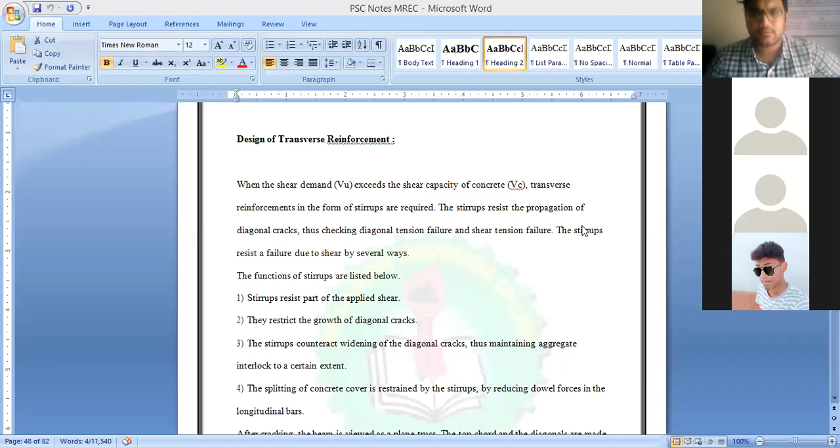So I think in the previous class we have done with the quiz. So few attempted very well, and the rest have to practice. Okay, so I request, I already forwarded you the notes, right? So please guys go through the notes and be up to date with the prestressed structures. So whenever college starts, we'll definitely start with a good industrial visit where I will try to show you

how the pre-tensioning and post-tensioning of structural elements like sleepers, precasting elements, girders, all these we can see in Hyderabad itself because there is a lot of construction going on. Even post-tensioning slabs are also going on. Okay, so they are very nearby, so we can go and visit them, right? So then you will have a clear idea on it.

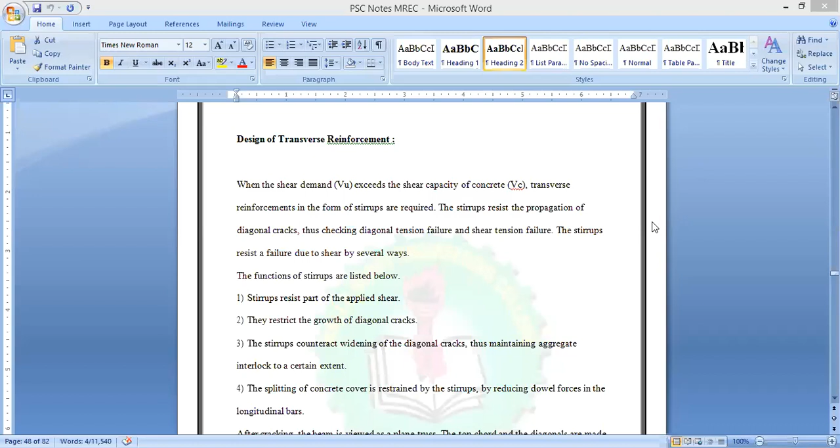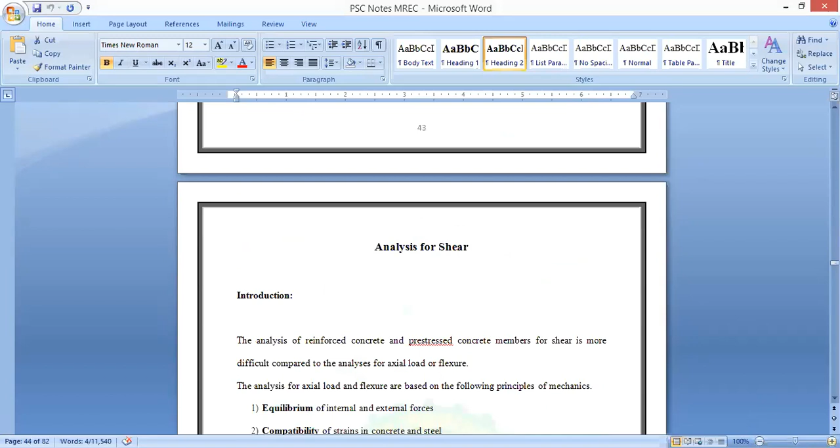Okay, so I think in the previous class we discussed about analysis of prestressed concrete structures towards shear, right? So let me just revise the content. So this is the analysis of shear. So here shear analysis is taking place with three different mechanisms. One is equilibrium, the other one is compatibility, and the third one is constitutive relationships of different materials.

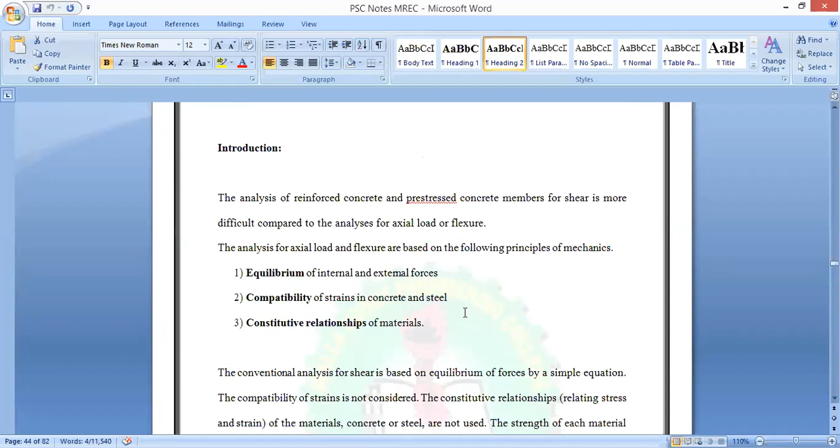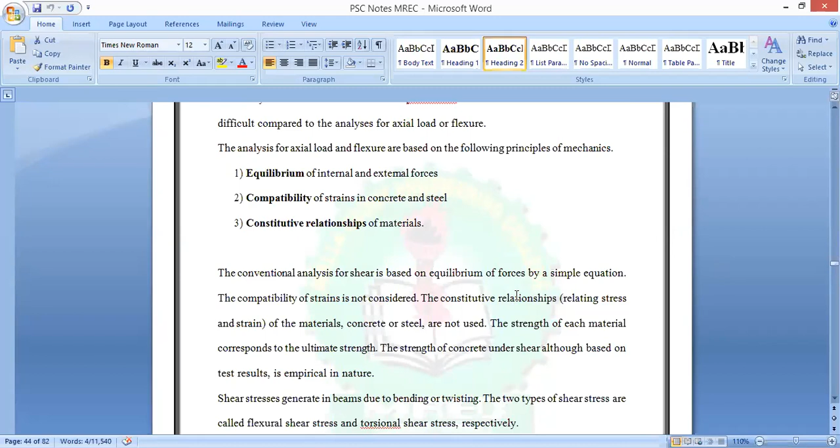Okay, out of which I think conventional analysis for shear is only based on the equilibrium of forces, with simple equilibrium conditions. Based on that only the prestressed concrete element will be analyzed in terms of shear. Okay, so here whatever shear stresses are going to be generated in beams due to bending or twisting.

Because I think you all have done a lot of experiments in strength of materials on it. When the member is subjected to torsion, you are going to calculate the shear modulus or modulus of rigidity, which is talking about the shear happening in the member. So the two types of shear stresses are called flexural shear stress and torsional shear stress. So this is what we are going to calculate.

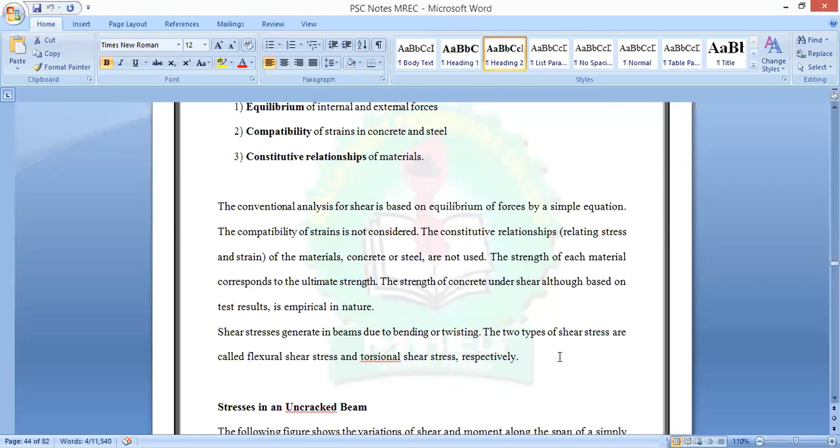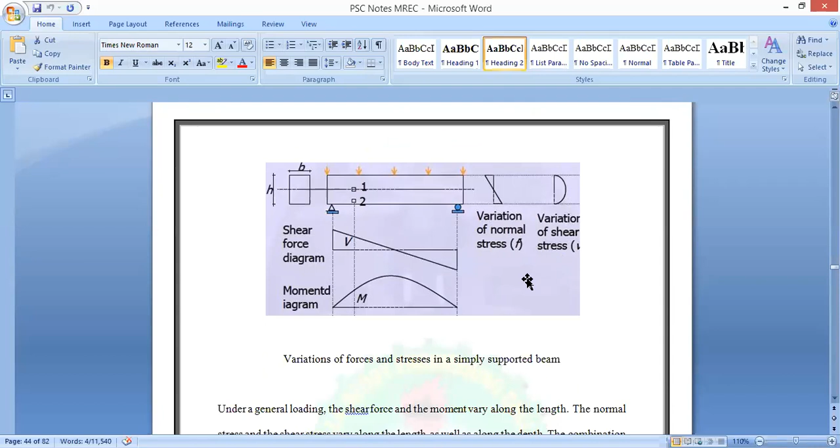In analyzing the member towards shear, right? So the stresses in uncracked beam, we already seen that. So here when a beam is subjected to uniformly distributed load, you can find the shear force diagram and bending moment diagram where the variation of stresses will be the normal variation like this, and the shear stress variation will be like this. This is the variation of forces and stresses in a simply supported beam, right?

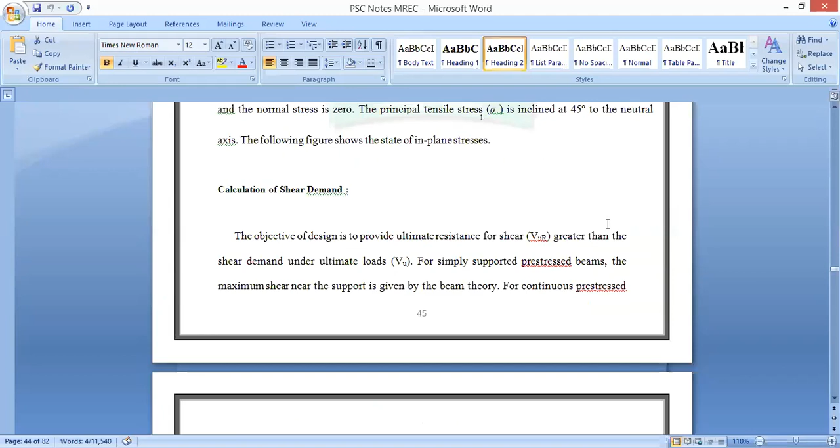And the next one is calculation of shear demand. So where exactly the shear demand takes place - it takes place at the circumference of the section, right? If you take a rectangular beam, you are supposed to provide the shear reinforcement only on its circumference. So the main objective is to provide the ultimate resistance for shear, which should be greater than the shear demand under ultimate loads. So obviously your design shear should always be greater than the applied shear force, right? That is how the calculation of shear demand takes place.

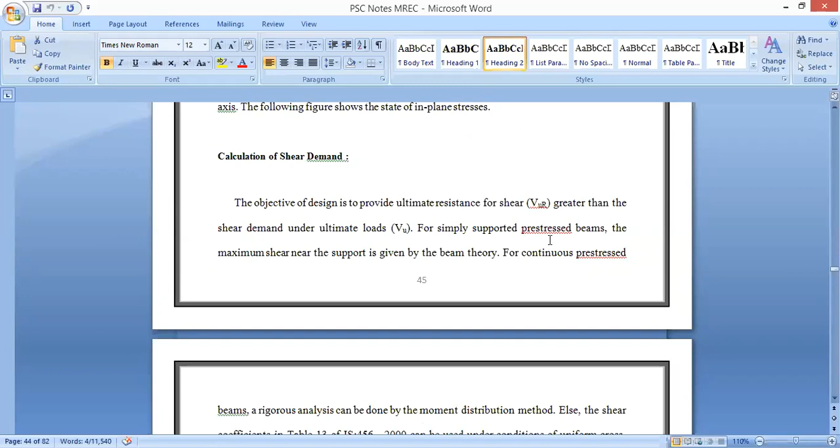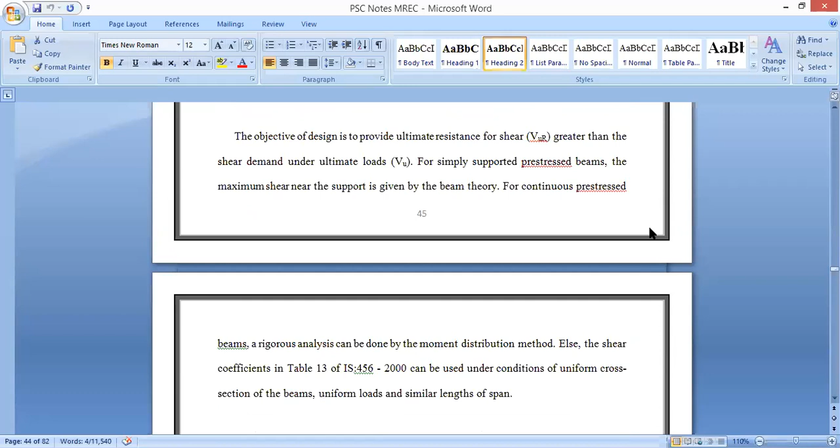So let us take continuous prestressed beams - there will be a rigorous analysis done based on the moment distribution method. Okay, else the shear coefficient given in IS 456-2000 in table number 13, which is based on different conditions of uniform cross section of the beams and uniform loads, and even based on its length - length nothing but length of the spans. Okay, so this is talking about the shear demand.

And the next one is design of stirrups. This also we've gone through - where exactly you will provide stirrups in a beam. At the mid span of the beam, the spacing of the stirrups will be more. Why? Because the shear stresses or shear force will be less. Shear force will be maximum towards the support. By that, more number of stirrups will be provided with less spacing towards the support.

Support in the sense, one fourth of the distance at supports will be having more stirrups, which takes care of the shear forces. At center there will be maximum bending moment, and shear stresses will be very less, almost zero at center for a simply supported beam.

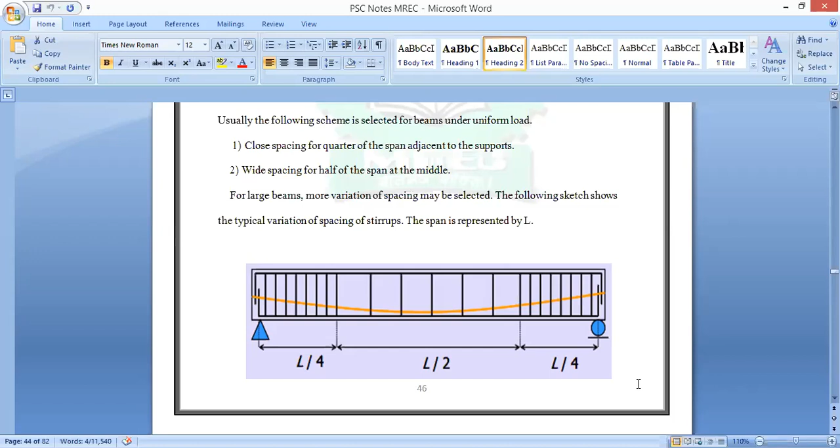If you take a cantilever beam, the bending moment and shear force will be more at the support. So the spacing of the stirrups will be very less towards the support, and towards the free end, the spacing of the stirrups can be more.

So in that way the stirrups are designed. For designing the stirrups, as per IS 456-2000, we will go through the design concepts. So the next one is the design of transverse reinforcement.

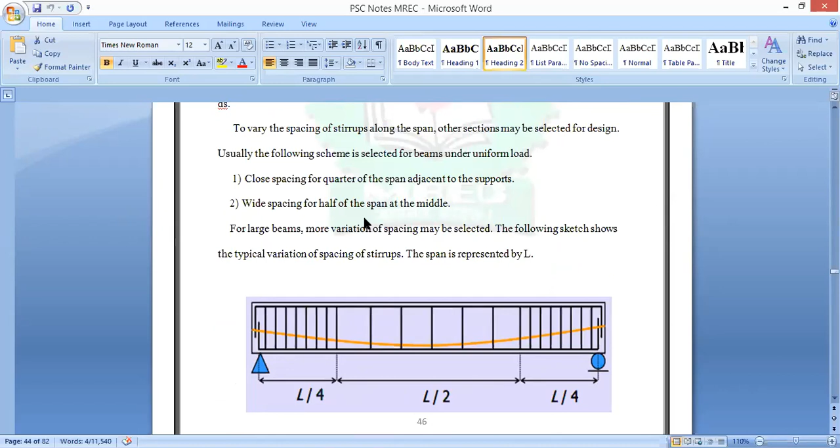What is the difference between stirrups and transverse reinforcement? Transverse reinforcements are nothing but a reinforcement which is provided to take care of the shear force. That is the meaning of transverse reinforcement.

What are the two reinforcements in a beam? There will be a longitudinal reinforcement, which runs within its length. And the next one is lateral reinforcement, also called transverse reinforcement, which is provided along its circumference.

So when the shear demand exceeds the shear capacity of concrete, the transverse reinforcement will be in the form of a stirrup. Whenever it exceeds, we are supposed to provide stirrups along its circumference.

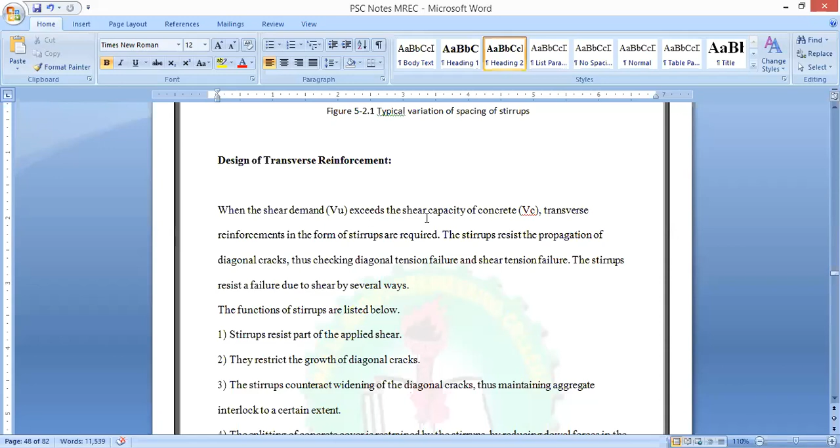So the stirrups resist the diagonal cracks exactly, and check diagonal tension failure and shear tension failure also. In that way, the stirrups resist failure due to shear by several ways.

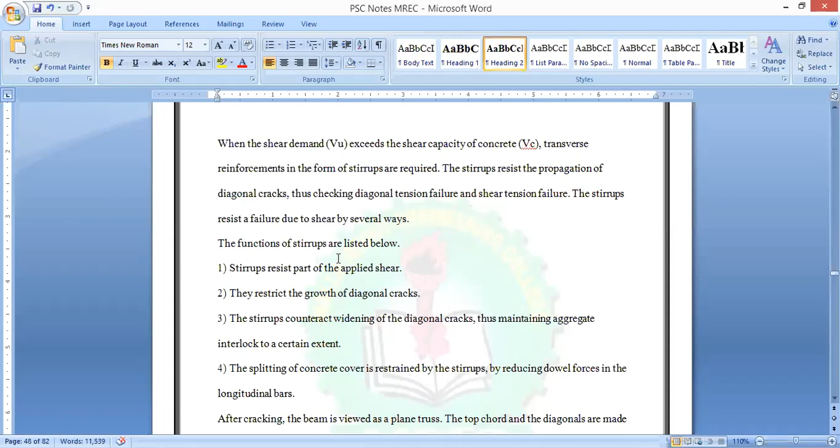How better the transverse reinforcement takes care of different types of failures - let us go through the different functions. The functions of stirrups are going to be listed.

The first one: stirrups resist a part of the applied shear. The stirrup reinforcement is only to take care of the shear forces. So that is the one reason why you provide transverse reinforcement.

Second one, it will resist the growth of diagonal cracks. In RCC, the shear cracks will be at an angle of 45 degrees at the ends, because there will be maximum shear force towards the support. So by that, it will resist the diagonal cracks.

So stirrups are provided to resist applied shear, and the next one is to resist growth of diagonal cracks. Third one, stirrups counteract widening of diagonal cracks - not only controlling the cracks, even if the crack exists, it will counteract and control the widening of the diagonal cracks.

This maintains aggregate interlock to a certain extent. So providing stirrups in a beam leads to counteracting or controlling the widening of diagonal cracks, which maintains aggregate interlock to a certain extent.

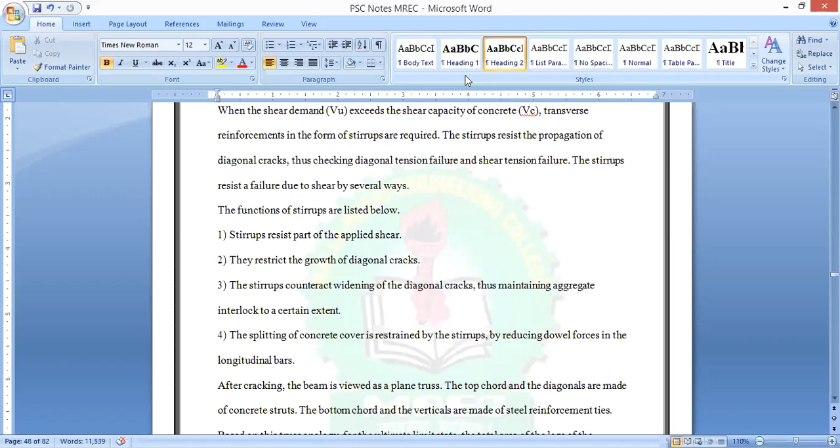In that way, shear reinforcement is going to be useful in any kind of longitudinal member. These are the functions, and these functions are very, very important. Please try to go through all this.

Very important. After cracking, what happens? The beam is viewed as a plane truss. The top chord and the diagonals are made of concrete struts, and the bottom chord. So if you view the beam as a plane truss, the top chord and the diagonals are made of concrete struts, and the bottom chord and the verticals are made up of steel reinforcement.

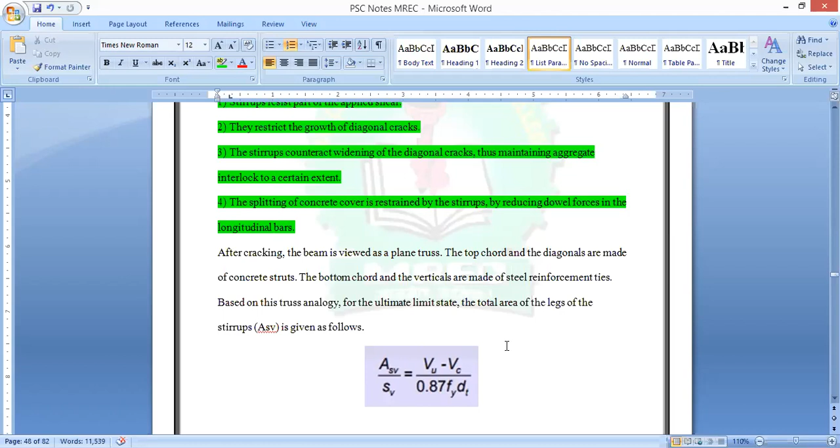So based on this truss analogy, what happens? The ultimate limit state and the total area of the legs of the stirrups is given by a formula. I think you all know this formula, which is also there in IS 456 2000: area of shear reinforcement by spacing is equal to.

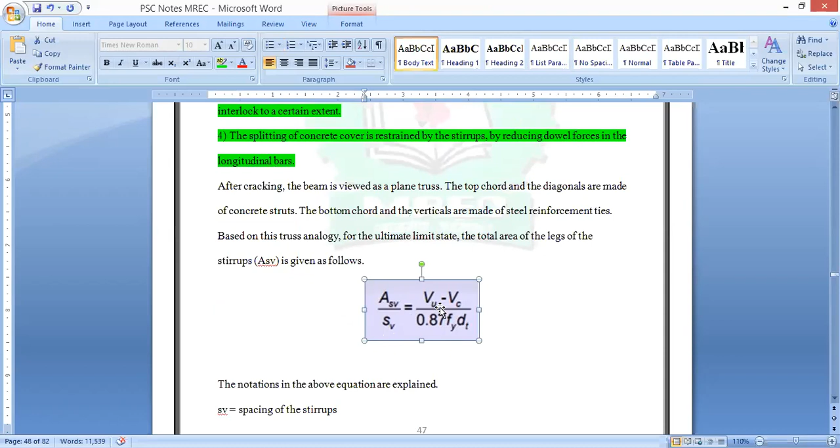Here you can see the notations. SV is nothing but spacing of the stirrups. DT is nothing but the greater of DP or DS.

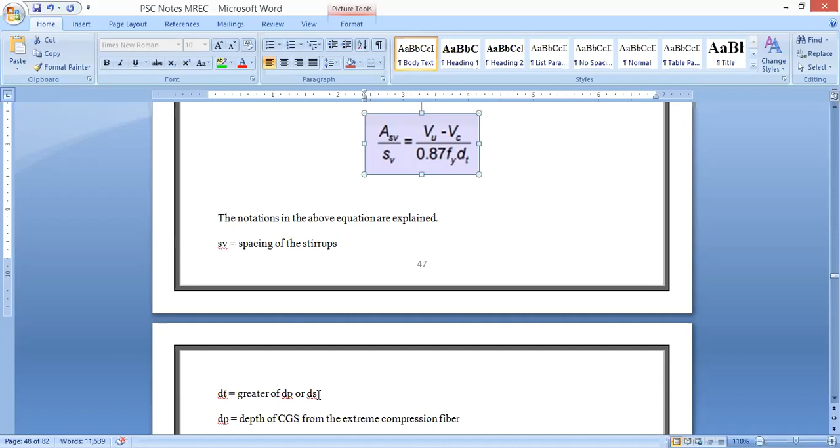DP is the depth of center of gravity of steel from the extreme compression fiber. DS is the depth of center of the non-prestressed steel. What do you mean non-prestressed steel? Whatever reinforcement we provide in a prestressed concrete beam to have skin reinforcement, to bring it into an I shape or rectangular shape, that reinforcement is the non-prestressed steel element.

Why don't we stress that steel? That steel is only to take care of the shear and to make that into an I shape. We call that skin reinforcement.

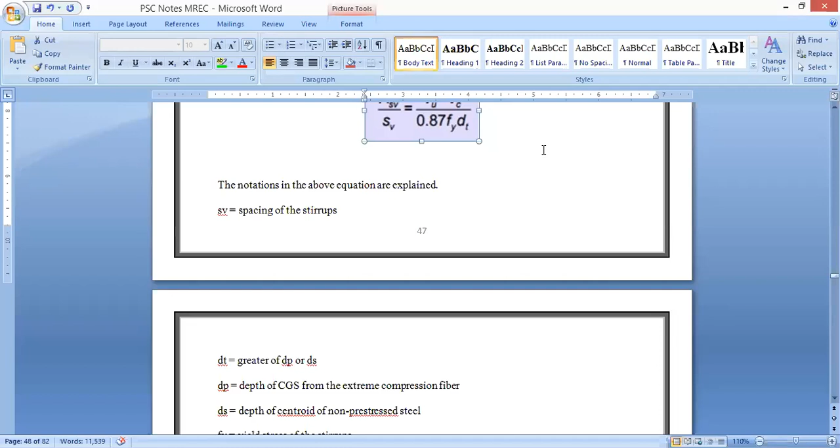Let us see the notations, then we can discuss the formula. SV is spacing of the stirrups. dt is the greater of dp or ds, the dt value you are going to consider, the maximum of these two: depth of center of gravity of steel from the extreme compression fiber, and depth of centroid of non-prestressed steel. We take the greater value of these two as dt.

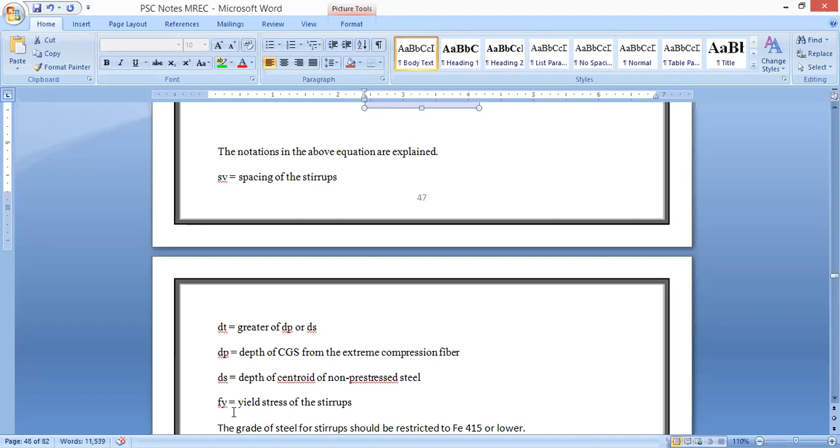The next one is Fy, which we all know is the yield strength of the stirrups. The grade of steel for stirrups should be restricted to Fe 415 or lower. You should not go more than Fe 415, because there is Fe 550 steel available, but you should not go for a higher grade steel for stirrups. Why? Because there's no need of that. You can go with even Fe 250 for making stirrups.

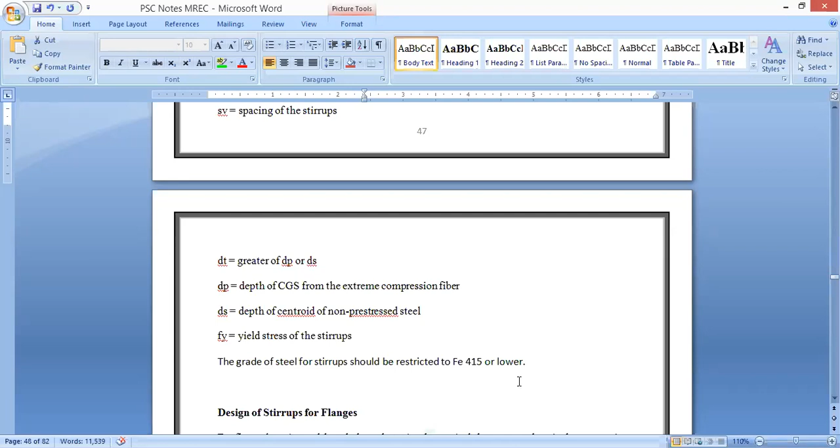And the diameter of the stirrups also won't go beyond 16 mm. It will be like 8 mm, 10 mm, 12 mm or 16 mm. They won't go beyond 16 mm even to make a stirrup reinforcement. So this formula shows you how to calculate the total area of the legs of the stirrups with the present formula.

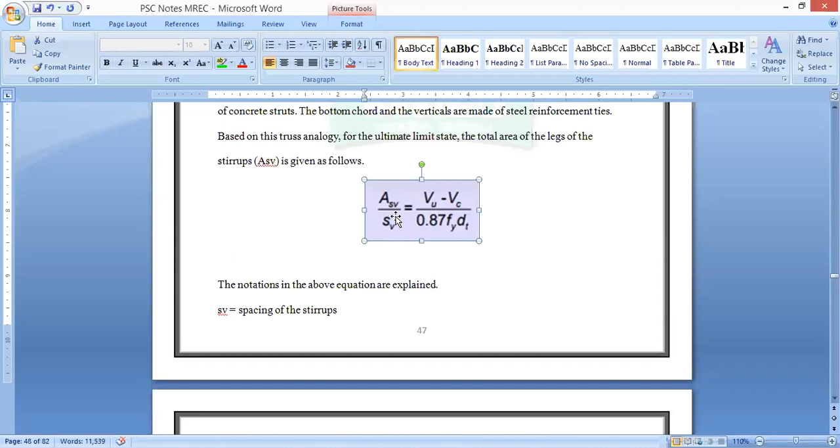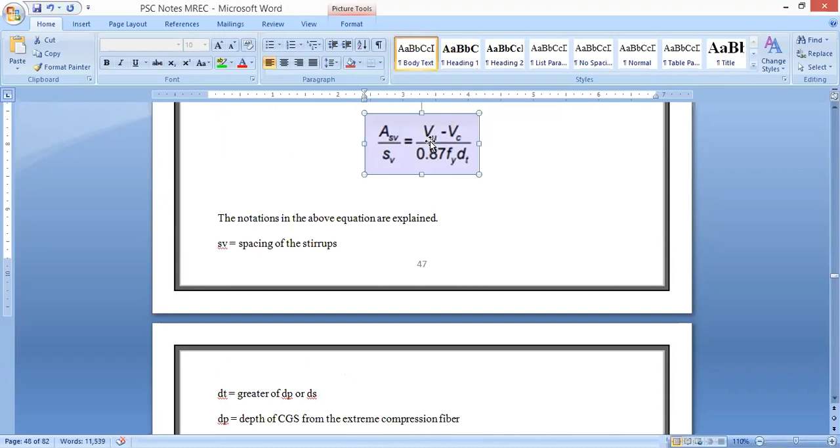VC is nothing but shear force in concrete, and this is nothing but ultimate shear force. The next one is design of stirrups for flanges.

How are you going to design stirrups for flanges? In your bridges, particularly prestressed beams will be in the form of an I shape or T shape, so there will be flanges. How are you going to provide stirrups for flanges? If it is a beam, there will be top reinforcement, bottom reinforcement, and stirrup. But coming to an I beam, there will be two flanges, top and bottom, and a web.

How are you going to provide stirrups for flanges? For flange sections, although the web carries the vertical shear stress - I think we all know, even in steel structures, if you take an I section, the top flange takes care of compression forces, the bottom flange takes care of tensile forces, and the web takes care of shear. In the same way, for flanged sections, particularly I section, T section, angular section, C section, the web carries the vertical shear, no doubt at all.

But there is a shear stress in the flanges due to the effect of shear lag. That is very, very, very important. Please highlight this.

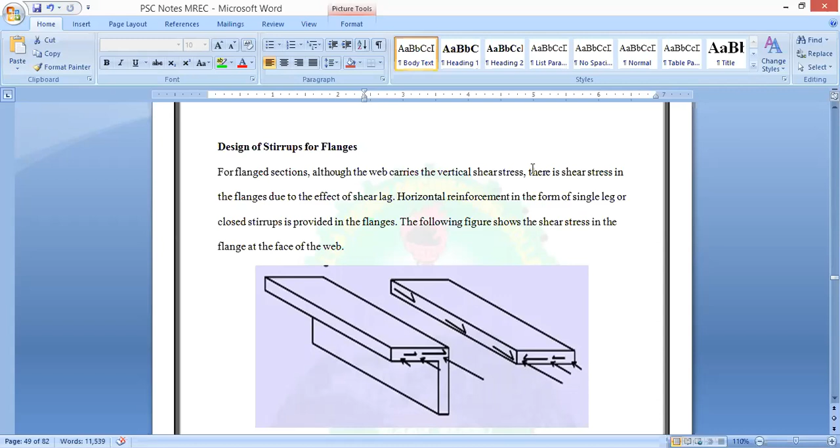Okay, because we all know web carries the shear stress. Web carries the shear forces, and by that we have to design web to have a maximum shear stress. But why do we have to design flanges also for shear? Because there is a possibility of shear lag.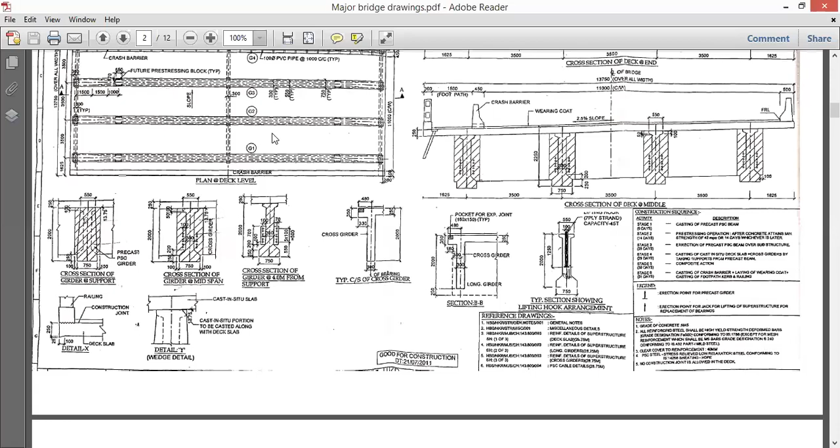So by that you can easily identify and recognize the reinforcement.

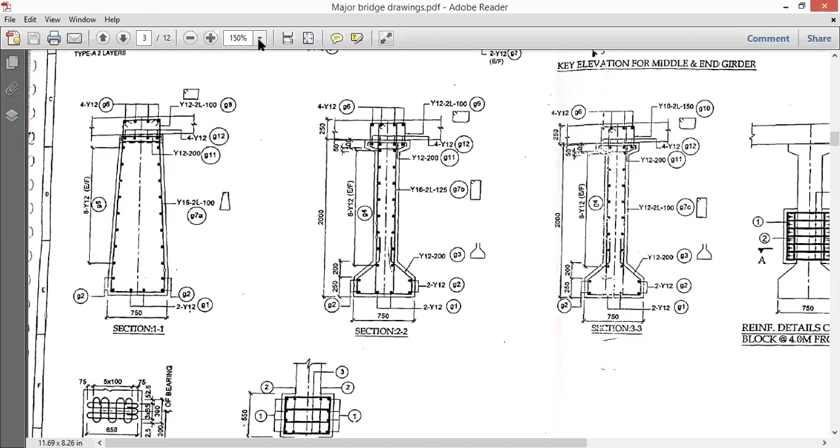Now for this I section, what are the flanges? The top is an I shape, the bottom is also an I shape. I mean flange — top flange, bottom flange, and web.

So if you take this as an example, let's show what is the main reinforcement and the stirrup, the shear reinforcement.

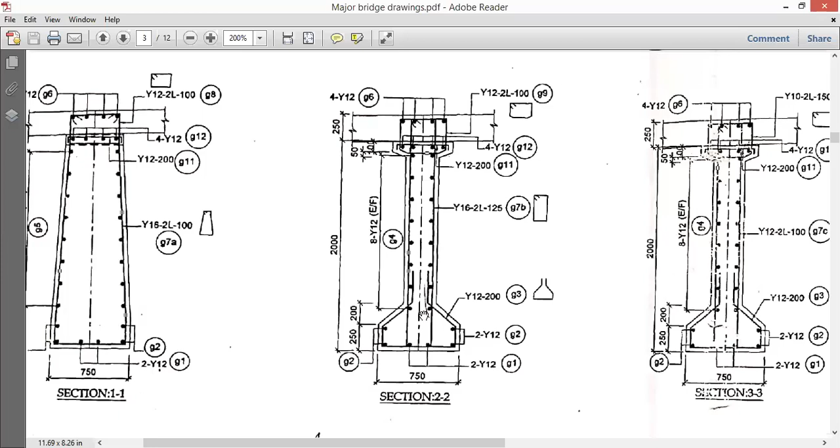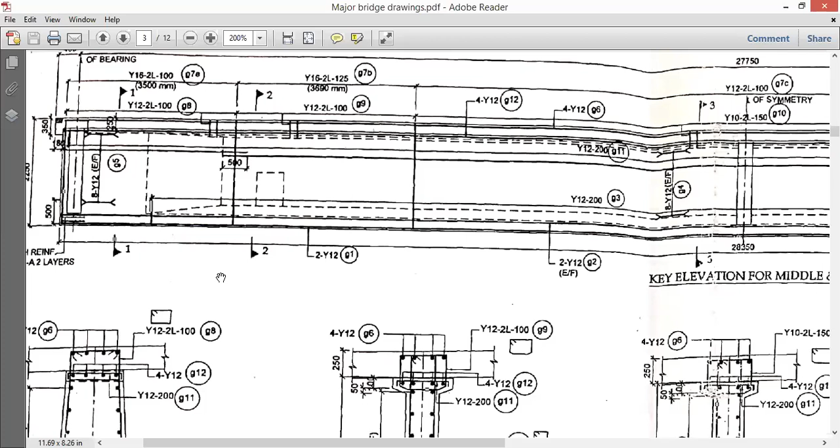If you see the girder from the end, it will be in the form of a trapezoidal shape. If you see the girder at section 1-1 - the longitudinal girder has a length of around 27.750 meters. At this section it will be trapezoidal shape, and if you see the same longitudinal girder at another section, it will be an I shape.

At center it is section 3-3, and at center it will look like this shape. So a section of the longitudinal girder will have a different dimensional pattern. When you see it practically, you will understand.

So, what are we discussing? We are discussing about the transverse reinforcement, nothing but stirrups or shear reinforcement for the flanges.

Why? Because there will be a shear lag effect in the flanges. That is the reason why horizontal reinforcement will be in the form of a shear single leg or closed stirrups provided in the flanges.

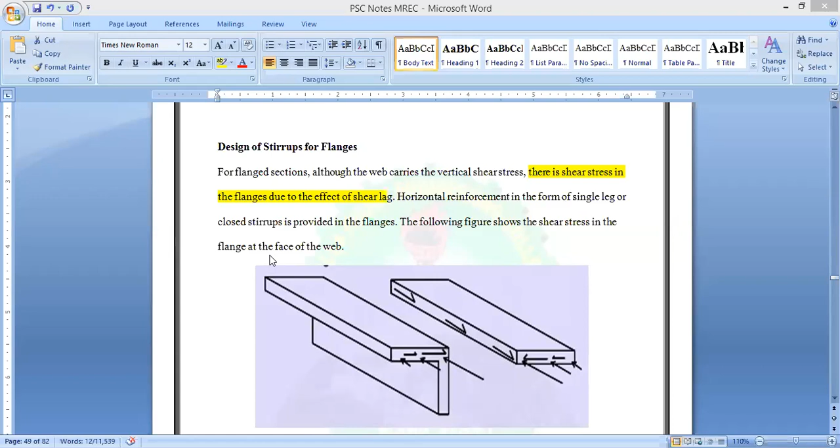The following figure shows the shear stress in the flange at the face of the web. Near the web's face you can clearly identify how the shear lag effect takes place on the surface of the flange. Because of this effect, you have to provide shear reinforcement to take care of the shear lag effect and resist the shear stress in the flanges also.

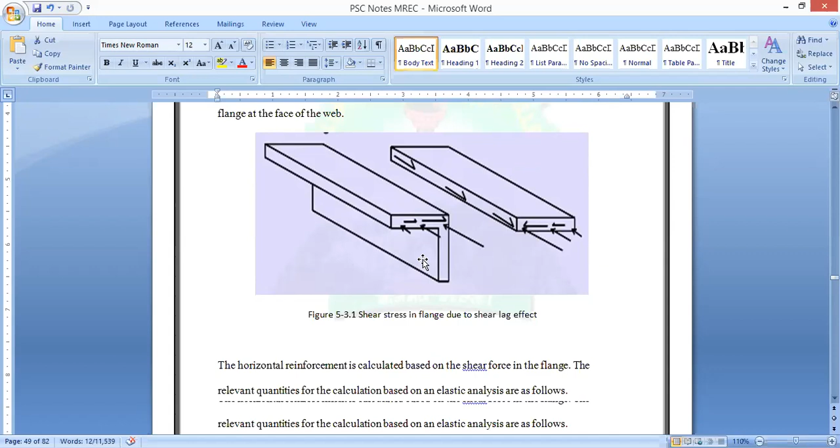So the horizontal reinforcement is calculated based on shear force in the flange. The relevant quantities for the calculation, based on elastic analysis, are as follows. First one, shear flow.

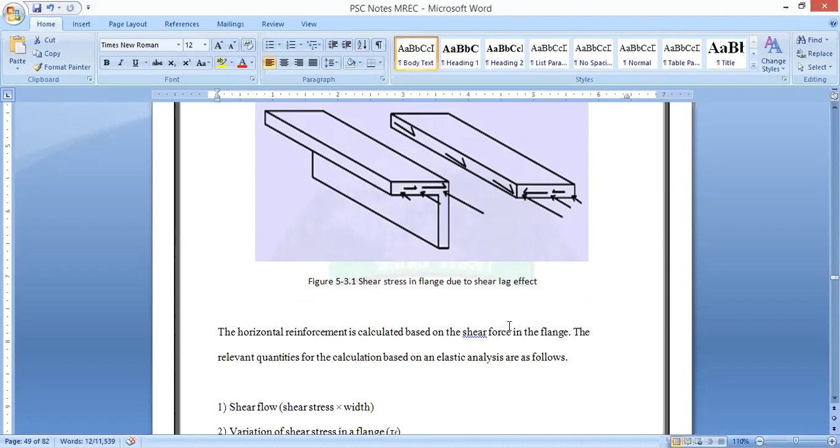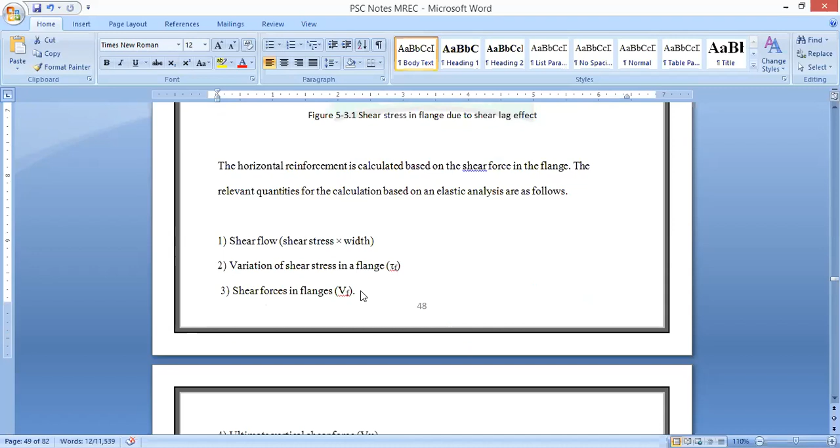What do you mean by shear flow? Shear stress into width. Next one, variation of shear stress in the flange, denoted tau F. Next, shear force in flanges, indicated with the symbol VF. Ultimate vertical shear force, VU.

These are the same formulas we saw earlier. VU is nothing but ultimate vertical shear force. VF is nothing but shear force in the flanges. Variation of shear stress in the flange is indicated with the symbol tau. Tau always indicates stress, V always indicates shear force.

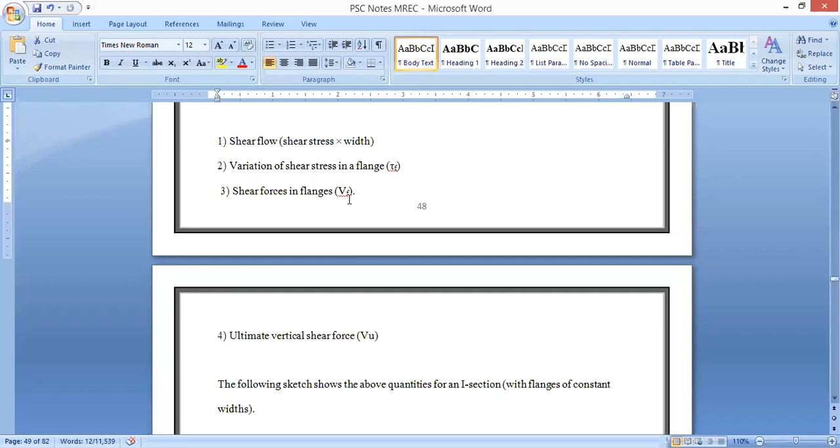Okay, now let's see how the shear effect will be on flanges - how it behaves in an I section. The following figure shows the shear flow and the shear forces in an I section, particularly in the flanges.

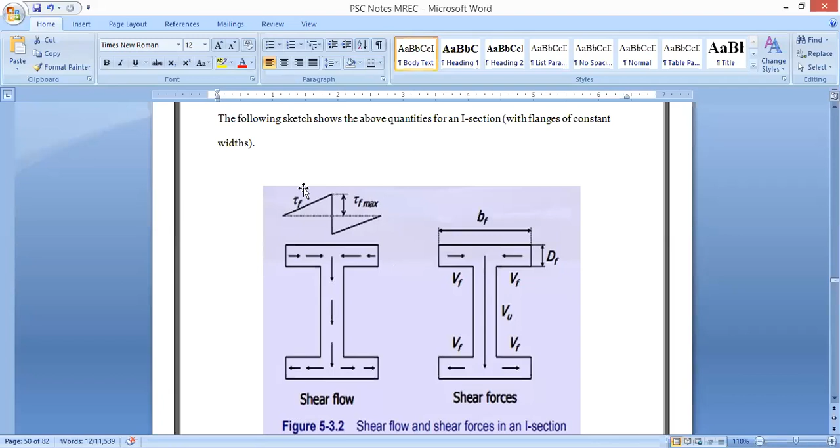With constant flanges, here I took a uniform section, which is a symmetrical section. This I section is symmetrical about both axes, X and Y.

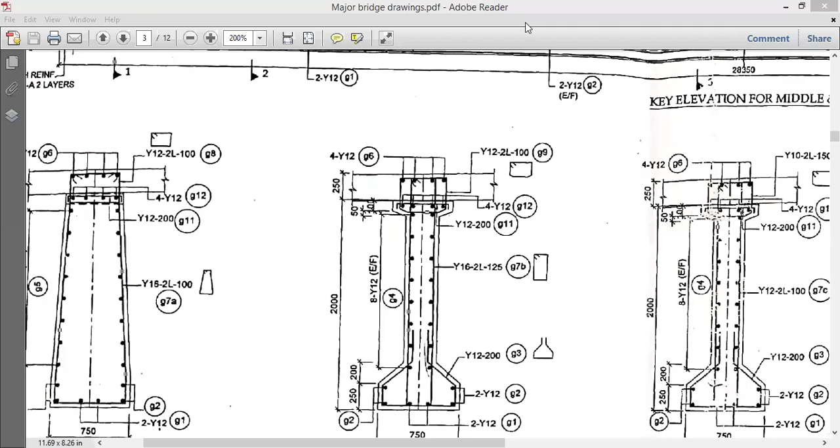What you saw earlier in the diagram - is this I section symmetrical? This one is symmetrical about the Y axis, but not symmetrical about the X axis, isn't it? So all our I sections need not be symmetrical - sometimes you may find I sections which are unsymmetrical about both axes too. So here we are talking about a section which is symmetrical about both axes.

So this is a section - here you can see how the shear flow takes place in the flanges and the web. See how the shear flows in the web and flanges. So this is the shear force, this is the shear flow - shear flow and shear forces in an I section.

So if you draw the shear flow diagram - I think you all know how to draw the shear stress diagram. How does the shear stress diagram for an I section look? Can anyone say how the diagram will be? The diagram will be something like this.

One second, let me show it on the board. So let me take an I section. In this I section, how does the shear stress flow take place along it - so this is the neutral axis.

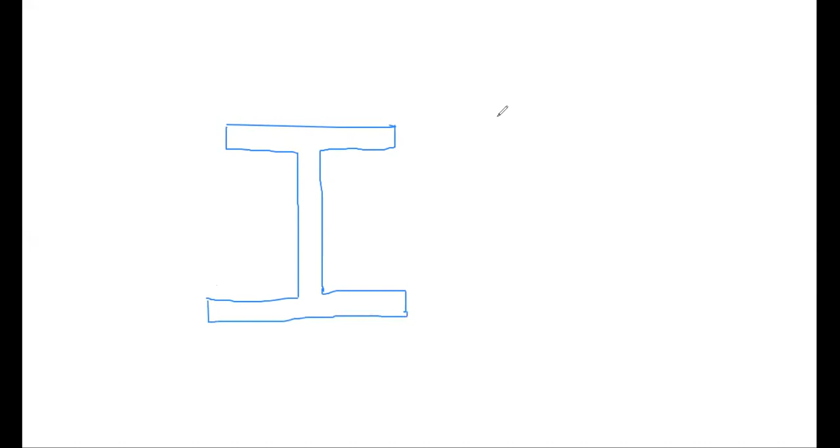I think you all know shear stress will be more where the width of the section is less. Wherever the width is less, shear stress is more there; wherever width is more, shear stress is less. So here, more width means zero shear stress, right?

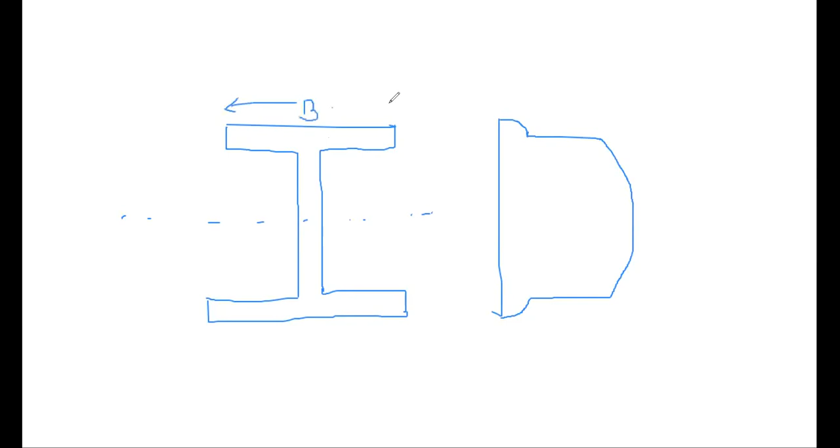At this junction shear stress varies because there is a sudden decrease in the width of the section. This is the width - so this is the width of the section, and this is small b.

So at this joint, what happens? There will be a sudden decrease in its width. When it decreases, what happens? There is a sudden change in the shear stress. So if you see here, this shear stress is for the flange and this shear stress is for the web. And the maximum shear stress is at the point having less width in the web. So this is the shear stress diagram.

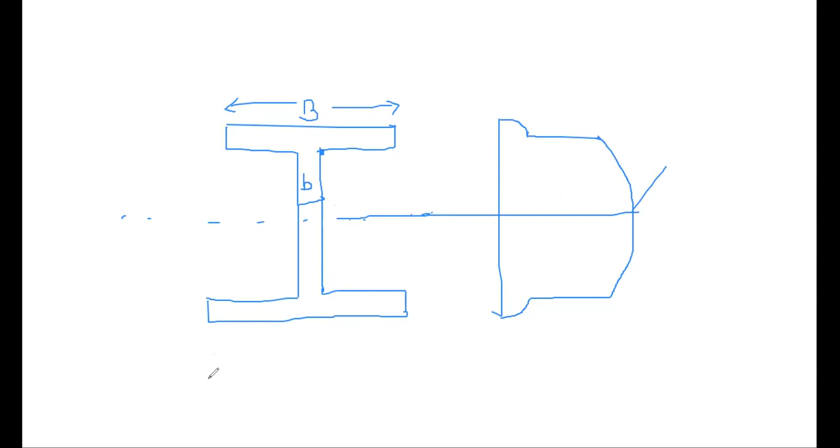Okay, so this is the shear flow diagram. The maximum shear flow, shear stress with respect to the flow will be more at Y axis. In the X axis we saw maximum shear stress. The shear flow also will be more at Y axis. At the Y neutral axis, maximum shear flow occurs. So this is how the shear force flow takes place in an I section.

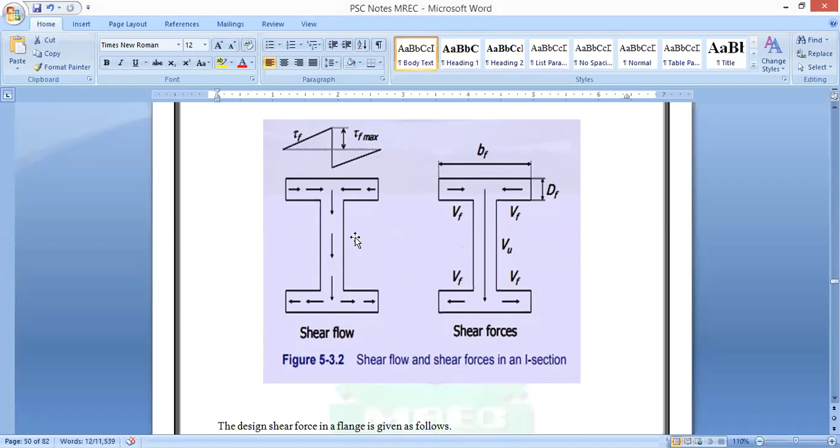Even if you take a T section also, it will be almost the same. Based on this, the stirrups are going to be designed for the flanges and also for the web. So the design shear force in a flange is given as follows.

Vf is equal to nothing but design shear force for the flanges. This formula is only for the flanges. Why? Because you all know how to design the shear stress for a web, since tau equals F into A into Y bar by I into B. That formula shows you how to calculate the shear stress, the maximum shear stress of a section. Here we are designing the shear force in a flange.

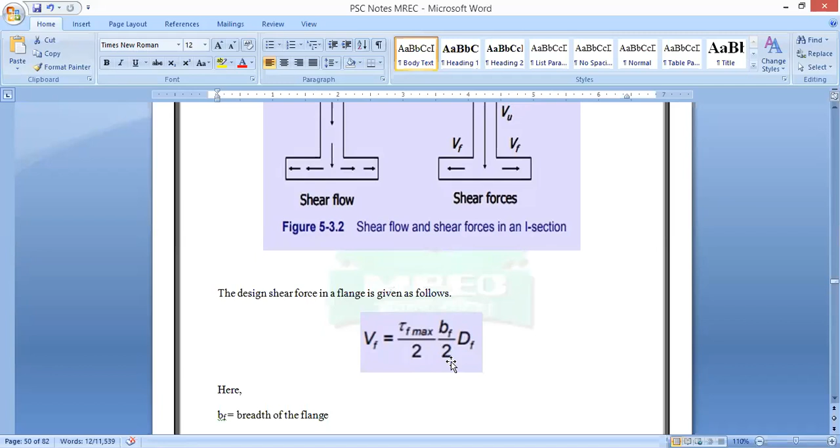The formula is Vf equals tau F max by 2 into Bf by 2 into capital D. What is Bf? Width of the flange. What is D? Depth of the flange. Tau F max is the maximum shear stress in the flange.

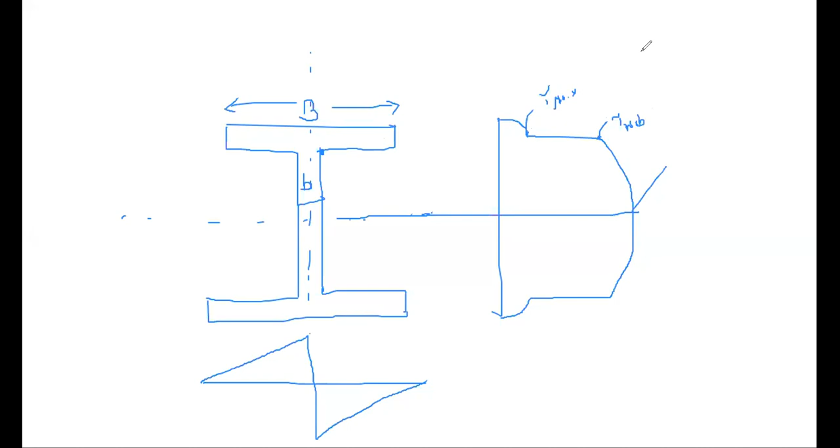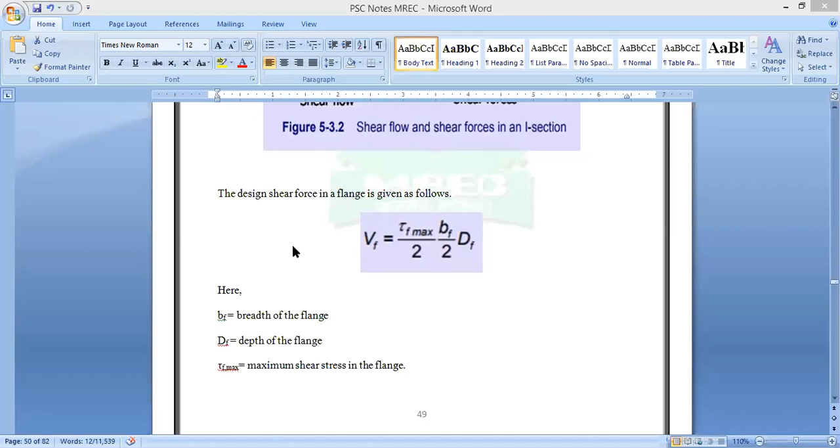Understand? So this is the maximum shear stress in flange, depth of the flange, width of the flange. With that you can calculate the design shear force in a flange. So this formula is going to be used.

Understand? Right? And how to calculate the maximum shear stress in the flange, which is given by an expression similar to that of the shear stress in the web.

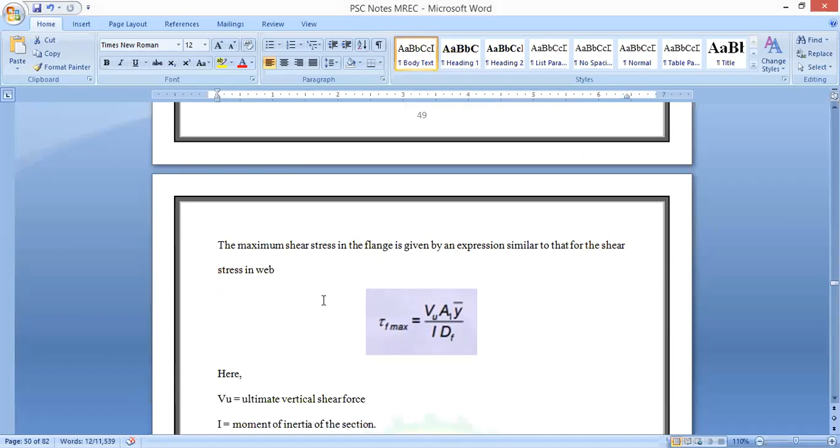How do we calculate it? We located tau F max there, right? How to calculate the tau F max? You can calculate tau F max with this formula.

What is the formula? Tell me. This formula we already studied in your strength of materials shear stress equation. What is the shear stress equation? Tau equals F into A into Y bar by I into B.

What is F? Shear force. What is A? Shear area. What is Y bar? Depth from the neutral axis to the center of the shear area.

What does that mean? Center of the shear area, which is subjected to slide, which is subjected to shear off. That portion which is the shear portion, from its center to the neutral axis depth. So that is what Y bar is.

Understand? In bending stress, Y bar is different. In bending stress, what does Y bar mean? Depth from the neutral axis to the outermost layer.

But in shear stress, what is Y bar? Depth from the neutral axis to the center of the shear portion. Whichever portion is subjected to shear, from the center of that portion to the neutral axis. That is what Y bar is.

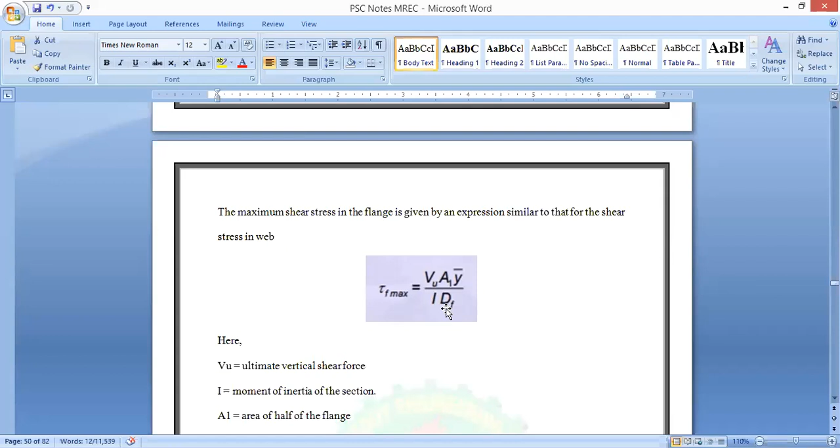And what is I? Moment of inertia. What is B here? B means DF, depth of the flange.

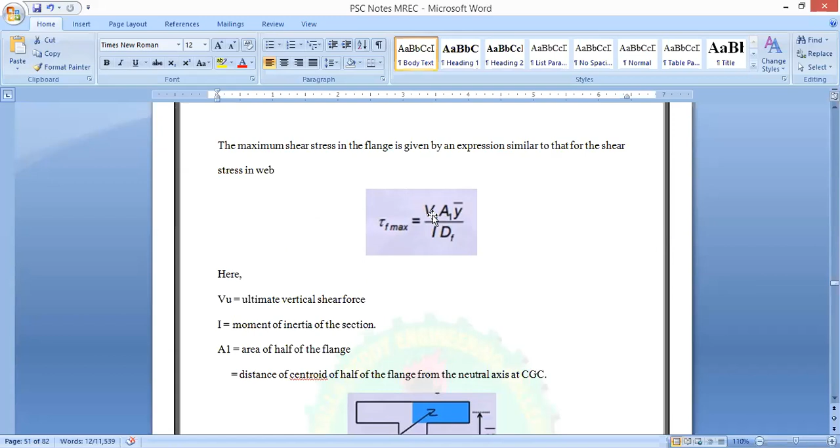So with this shear stress formula you can calculate the tau F max. Right? So in strength of materials, no new formulas are there, it's the same.

So with this VU you can calculate the ultimate vertical shear force. I is the moment of inertia of the section. A1 is the area of half of the flange.

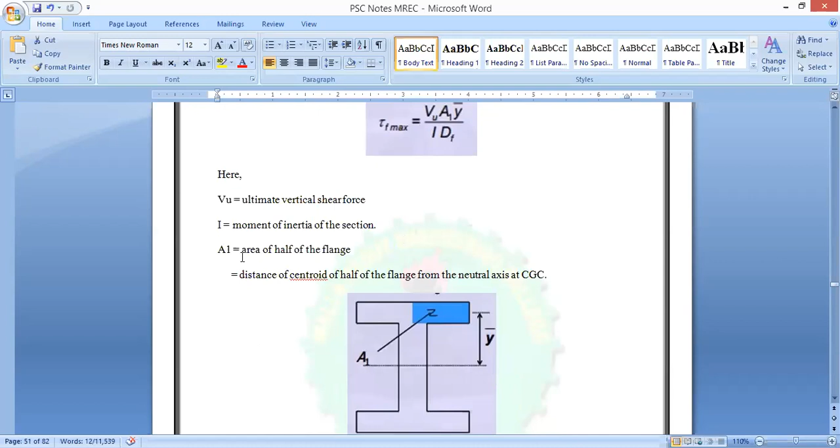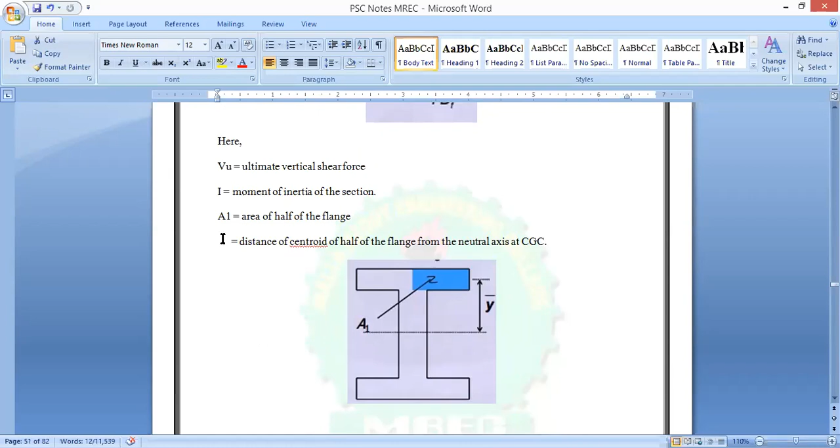And what is this? Y bar. This Y bar got missed here, please check it once. Y bar is nothing but the distance of the center of half of the flange from the neutral axis.